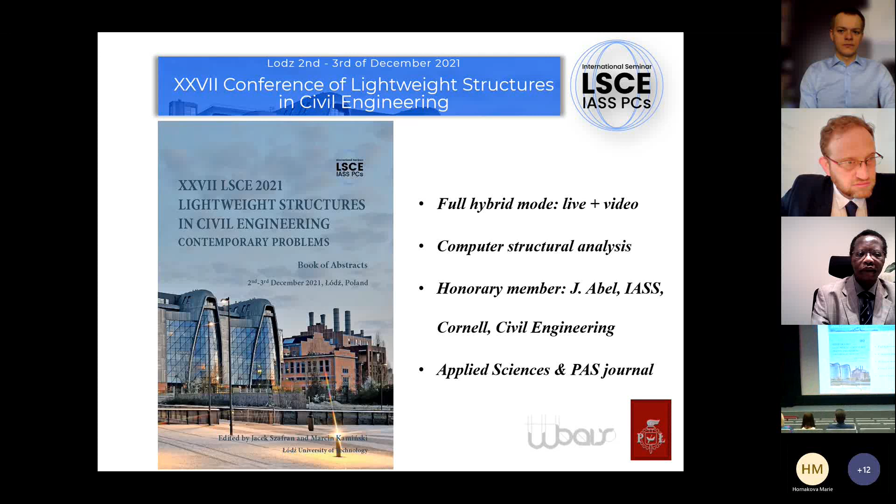Some basic facts about our conference are collected in this slide. We have 4 general lectures from Japan, Italy, South Africa, and the United States of America. We have 3 invited lectures, domestic lectures from Lublin University of Technology, Poznań University of Technology, and the Institute of Fundamental Technological Research, Polish Academy of Sciences, as well as 31 regular lectures and presentations delivered by participants of this conference.

This led to 2 days of our meeting, unusually, and you have some listing of how many presentations are from specific centers in Poland.

The scientific committee of this conference consisted of 43 members from Austria, Italy, France, England, Scotland, USA, Japan, so highly recognized scientific researchers all over the world.

We have no parallel sessions. That is very important. Each participant of this conference will see everything if it is necessary and interesting, of course. We would have some dinners, gala dinner and farewell dinner today and tomorrow, later on, 5 p.m. And you are, of course, invited to see our city, as our dean said before.

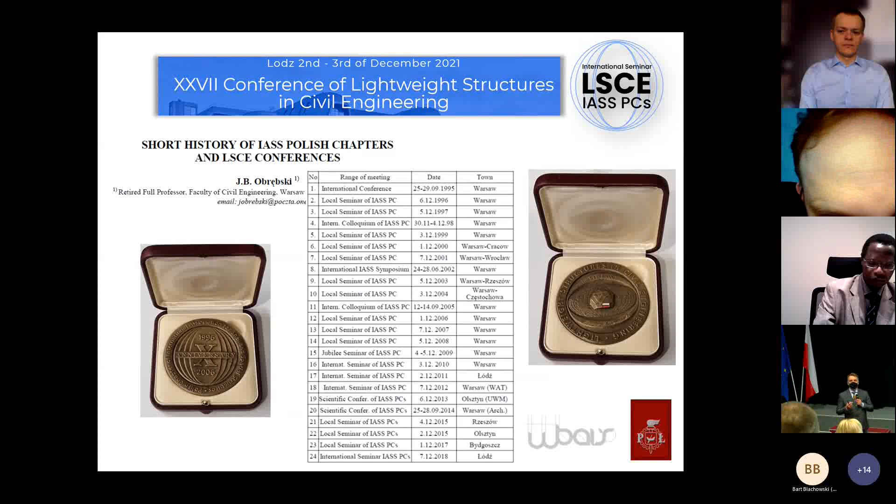It is not convenient maybe, but I would like to say that we have a relatively long history of our meetings. As you see, the first meeting was in Warsaw in 1995. After this conference, Professor Obrebski asked 3 persons to enter his room, and we established year-to-year meetings to present what we do.

So as you see, mainly in Warsaw, Warsaw University of Technology, but some other cities also: Kraków, Rzeszów, Bydgoszcz, Olsztyn, and also Łódź. In 2005, it was very nice for me to get the medal sponsored and designed by Professor Obrebski for the first 10 years of presence of IASS in Poland.

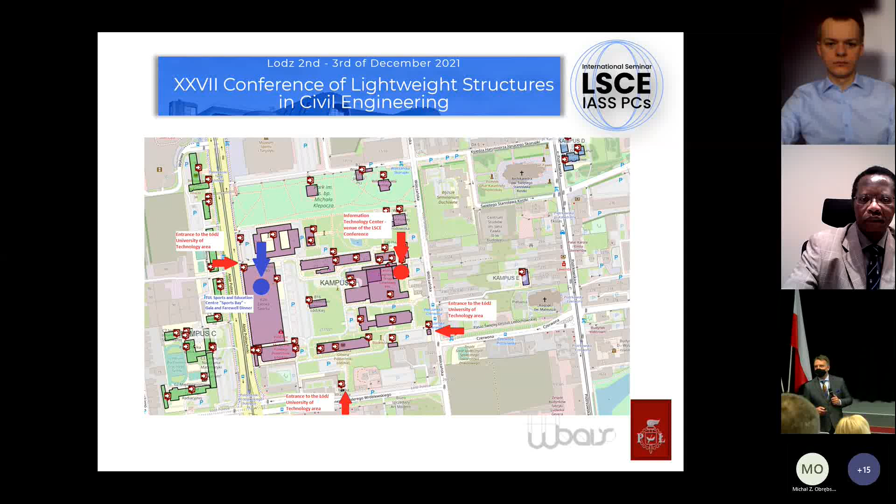Just a few places: we are located here at the Information Technology Center, that is our room, the entrance to the Łódź University of Technology on Aleja Politechniki, as well as our beautiful and enormously big sports bay, where we will have dinners, and maybe you'd like to visit for sport reasons. That is Piotrkowska Street. Everybody wants to see that. A lot of people, even from out of our country, ask what's going on at Piotrkowska Street. So that is our very famous Piotrkowska Street, and just a few important places for everyone.

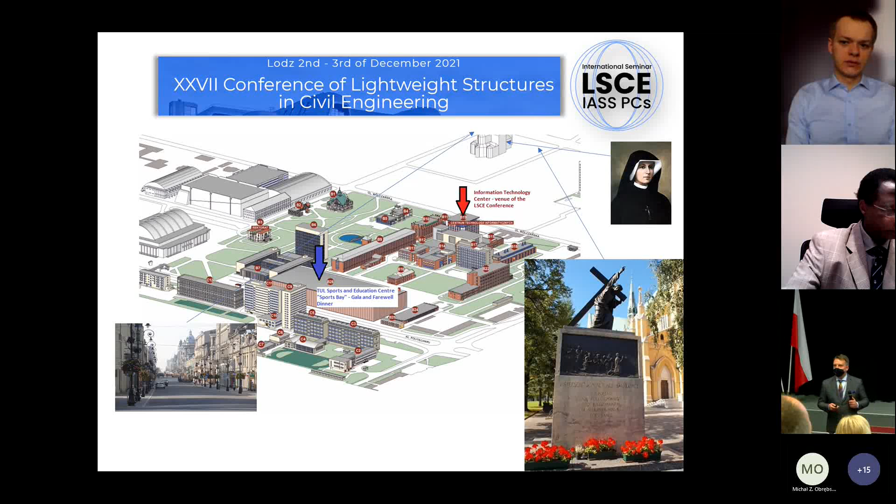Piotrkowska Street looks like that, and it's very close to our cathedral. We are located here, just a few blocks away, as people say in America. That is a memorial place of priest Ignacy Skorupka, who was very important for our history in 1920 - he led Polish troops against Russians during the Battle of Warsaw. Also very important for our city is St. Faustina, who has a specific path in Łódź, and our cathedral is one of them. So please enjoy our city and find everything interesting in it.

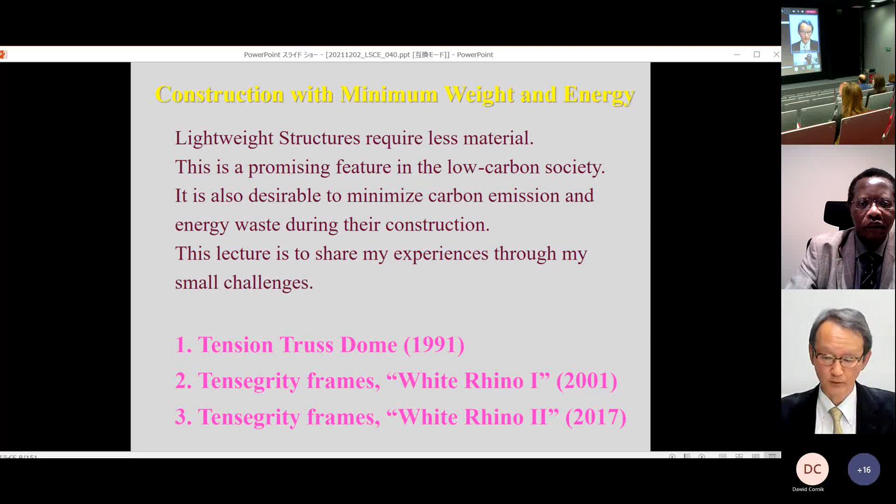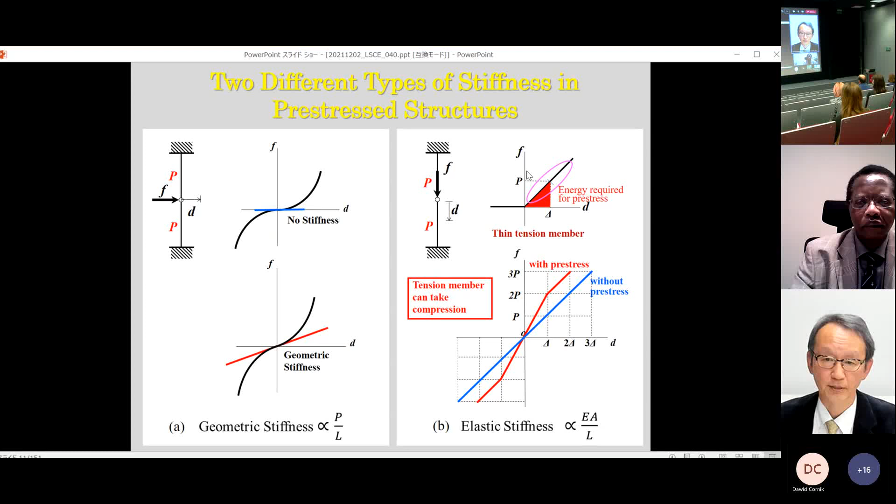If we prepare the prestress frame, we need to input some strain energy to the structure during construction. So one of the topics today is how we introduce the strain energy for the prestress during construction. The first challenge was for the construction of a tension truss dome.

When I was a PhD student, I was asked to propose an extremely lightweight structure for the construction of an annex space on an existing building. Because the existing building was old and not designed to have an extra building on top of it, we needed to design an extremely lightweight structure for the annex space of this roof space.

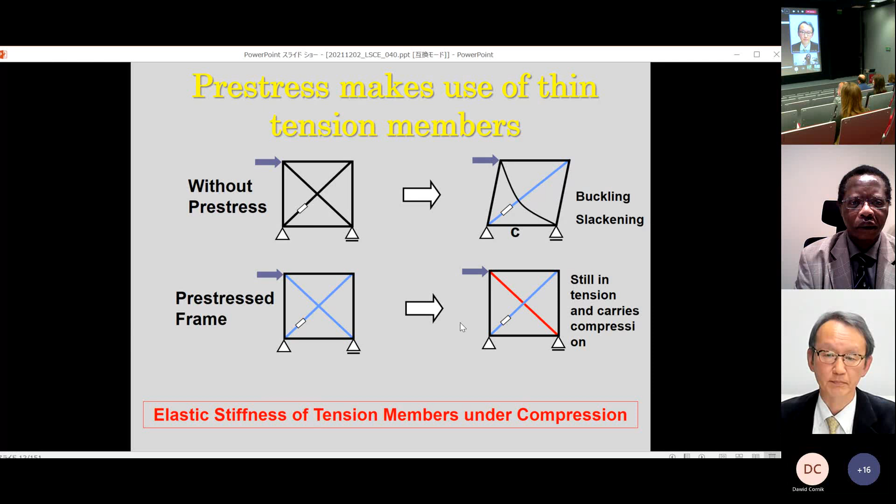During that consideration, I thought why not use this effective feature of lightweight structure. So I investigated and proposed some prestressed frame structure. Finally, what I proposed for this project was this type of unit structure, which I later named the tension truss. This is a unit structure which consists of 4 bar links, 1 isolated post, and 8 tension rods.

In this formation, this unit structure has one statical indeterminacy. That means the pre-stress mode has only one mode, so all the pre-stress in the members are proportional to this one mode.

I also plan to introduce how to introduce the pre-stress into the members, using a small turnbuckle. This is a specially designed turnbuckle, which will be rotated at a certain level of torsion to

shorten the length of the member to introduce pre-stress to the structure. That means we need to introduce some strain energy during construction. Before construction, we made a mock-up model with 4 units, and experimentally we evaluated that a torsion of 4 kilonewton centimeter can introduce 10 kilonewton

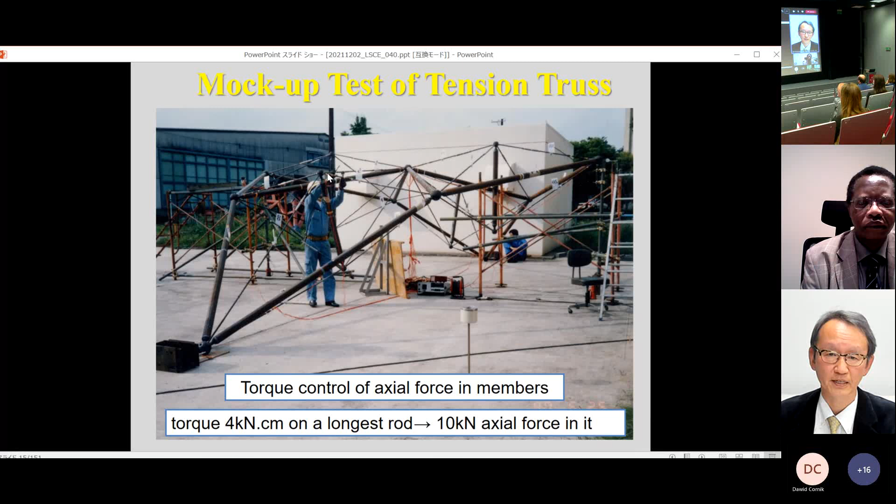axial force to the longest member of the unit. We used this result, and at the construction site we also used a special device called a torque wrench, which clicks at a certain fixed level of torque, and becomes flexible, relaxed, once it reaches that torsion. This device was very convenient for introducing the torsion, and the actual compression or tension, into the member.

This is some measured result at the site. The level of tension introduced was mostly okay for the design value, but at the same time we had several differences, so I thought we need to develop some theory later.

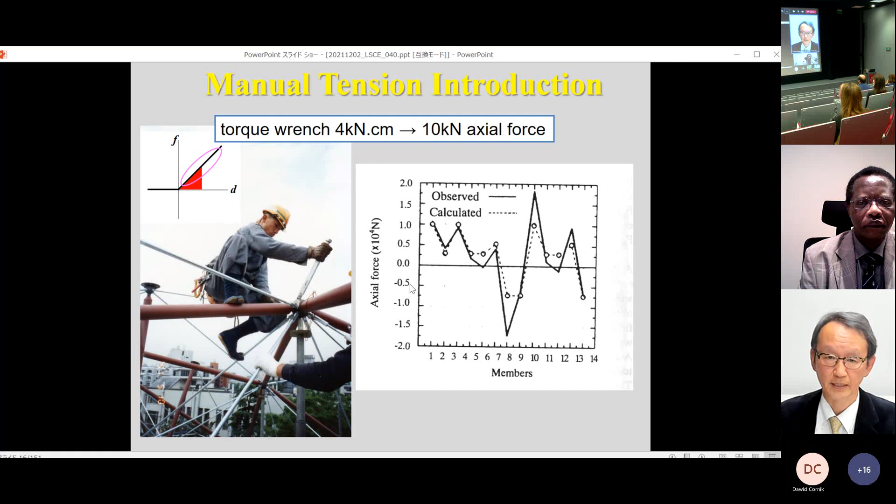This is a view after construction of this tension truss dome. The construction went very successfully, and I was very happy to realize such a lightweight structure for the annex of the building. This is an interior view of the completed structure, and this is the exterior view.

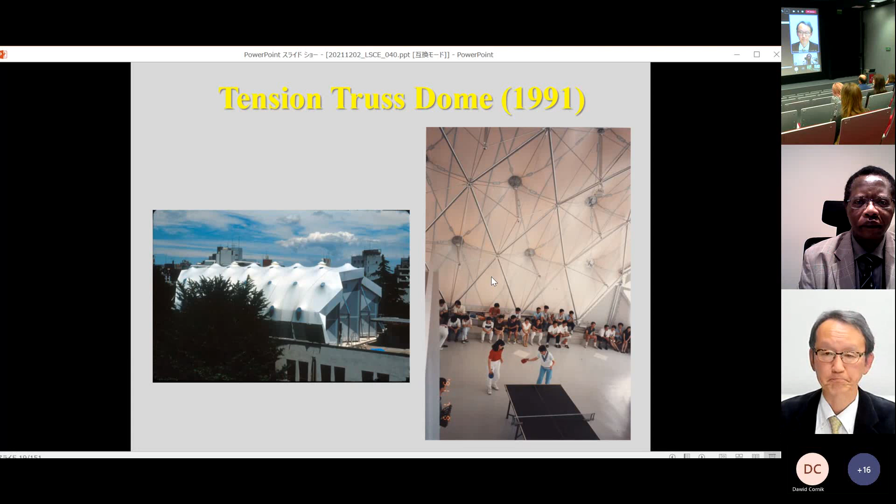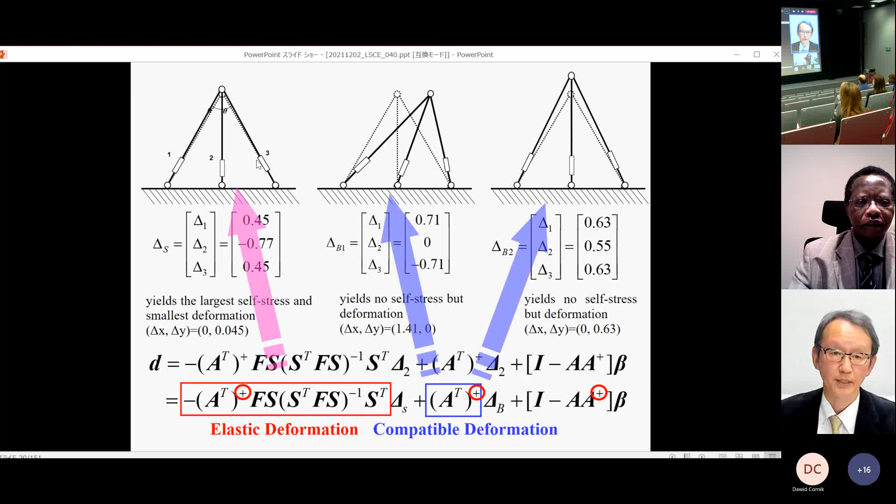During this construction and design, I felt that we need to develop some theory for the operation of a frame structure with many turnbuckles. We have already developed the theory for how to control the length of the members of the frame with many turnbuckles, but today I don't want to go into the detail.

At the same time, with this formulation, we could calculate the strain energy induced to the structure during the operation.

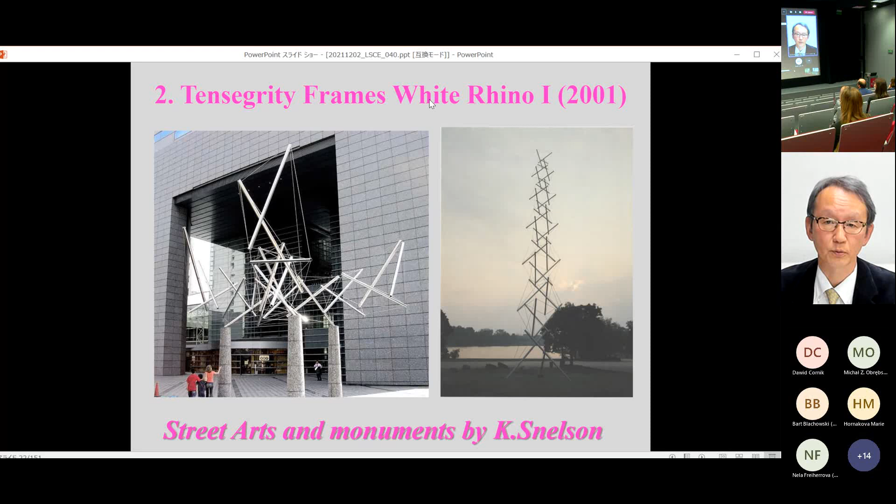The second example challenge I would like to share with you is about the design and construction of tensegrity frames, called White Rhino I, constructed in 2001. This is a typical tensegrity frame. This type of structure can stand for its own weight and it looks stable.

However, it is well known that the rigidity or stiffness of this frame comes from the geometric stiffness. That means the stiffness of this structure is very, very low, nonlinear, and low.

So I propose to add 3 more tendons to this structure. These 3 tendons very effectively act as a member to introduce more prestress to this structure, and can also take the compression after the prestressing.

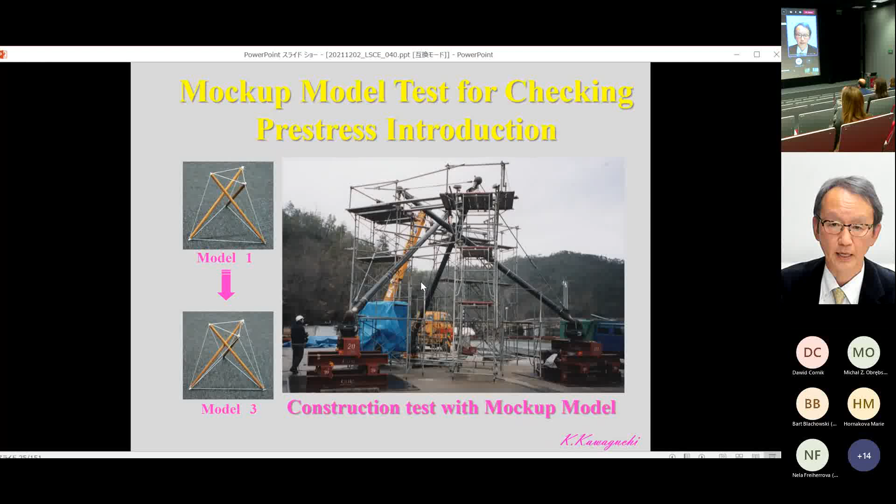We made a mock-up model and checked how we introduce the prestress into the structure. This is a view of this frame during the construction.

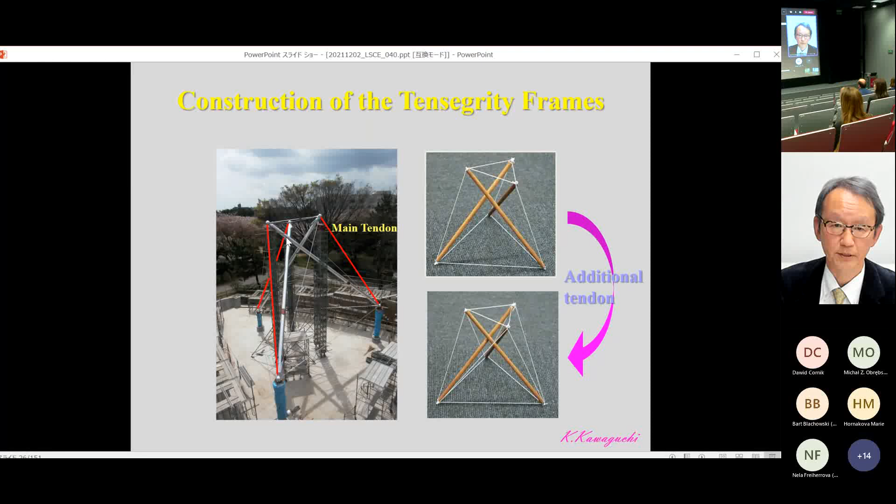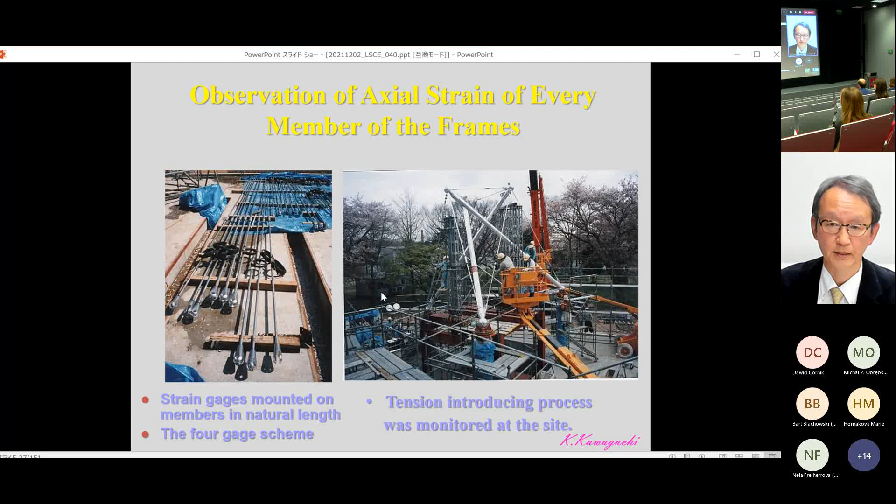As you can see here, first we put the main tendon for the original tensegrity, and we added 3 more tendons to take the compression load or stress under external loading. We mounted strain gauges on all the members and monitored all the tensions at the construction site. Again here, we also used human power to introduce the tension into the frame, prestressing the frame.

Actually, there is a limit to the amount of tension that manpower can introduce by turning the turnbuckle of the tension member. I will show you later, but that is normally about 40 kilonewton at the construction site. So in this case, we limit the maximum tension that one person can introduce to one tension member to 30 kilonewton.

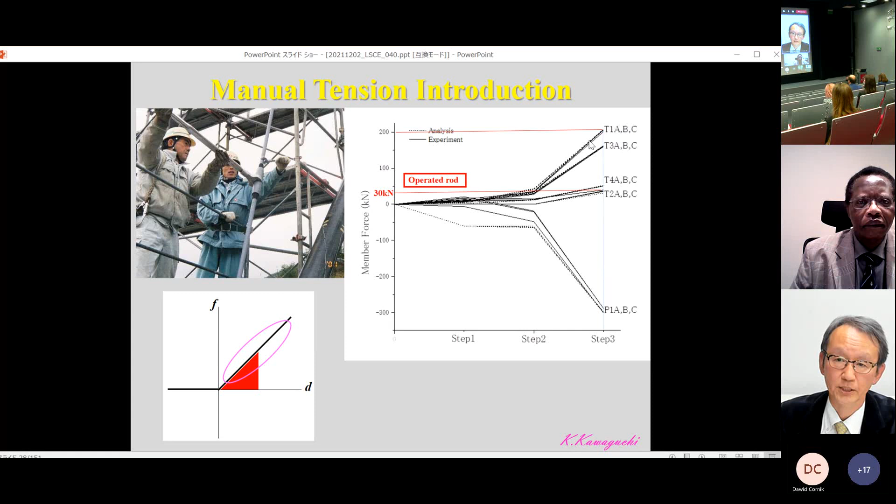Through this procedure, it is possible to realize a much higher prestress level of members in the structure.

This is a view of the skeleton prepared for the membrane roof, and this is an interior view of the structure when it was completed. As far as we understood, that was the world's first structure using a typical tensegrity skeleton as a structure member to support a membrane roof.

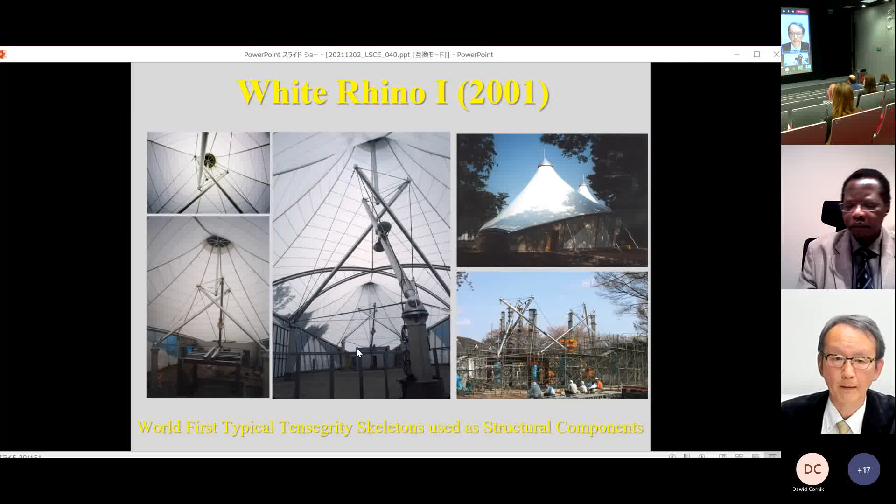For the introduction of prestress to this type of steel frame, the turnbuckle is very important. So we tested and checked the behavior of the turnbuckle. We measured the maximum tension that one man can introduce to one rod by turning the turnbuckle.

In the laboratory, the amount was something like 80 kilonewton. However, the condition of working is very different at the construction site. So we limit the maximum tension that one man can introduce to one tension rod to about 40 kilonewton.

For example, the man is standing on such unstable decks, so we need to expect a much lower level of tension that he can introduce to the tension members.

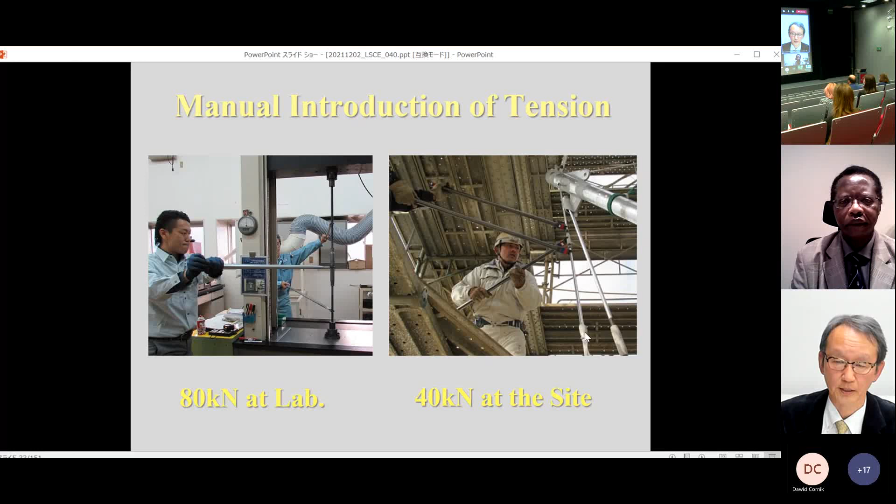The third example I would like to share is a tensegrity frame, White Rhino 2, which was completed in 2017. In this case, we designed two types of tensegrity frames to support the membrane roof.

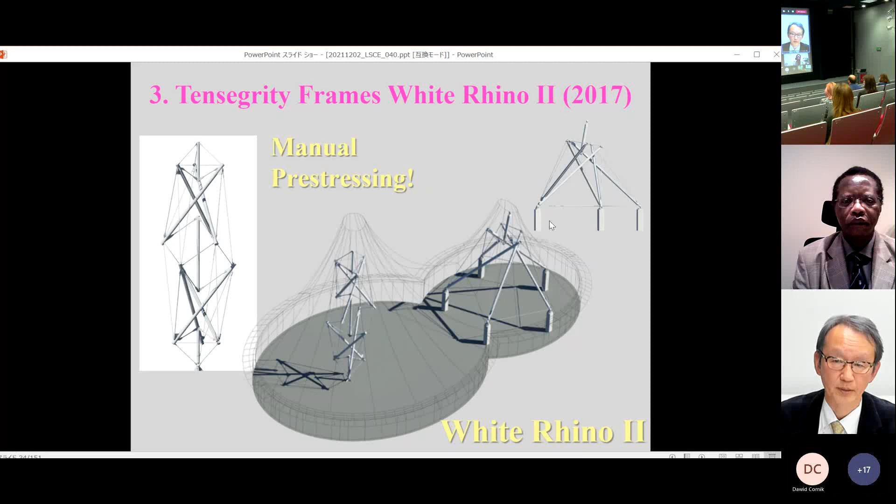Today I just explained about this tower type tensegrity. Actually, we designed this pentagonal type too, but today I don't speak about this because of the time.

This is an arrangement of the members of the tower type tensegrity. As you can see, this is more complicated than the former one, and we have many tension members and compression members, and also many turnbuckles installed on most of the tension rods.

This time, we didn't have enough time for making a full-scale mock-up, so instead we made a 1-to-10 scale model to check the prestress introducing scheme.

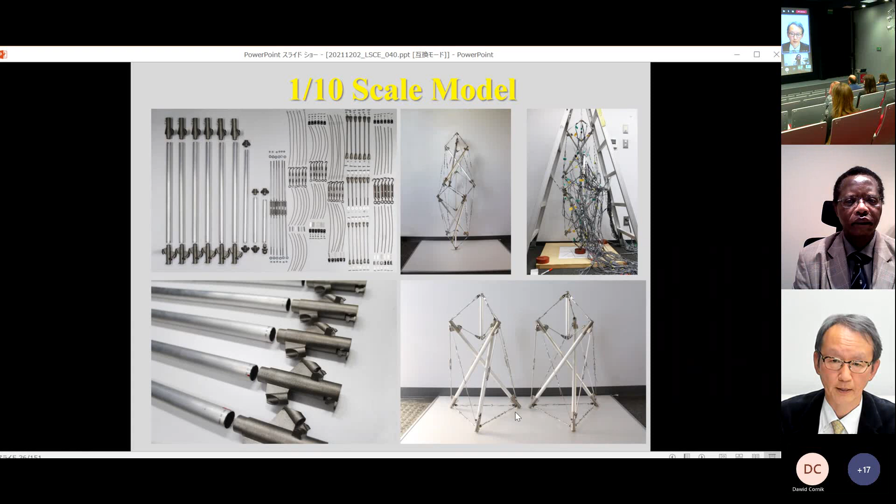First, we prepared these two tensegrity frames, and we attached these two models to each other to make a tower type structure. This is a connection area, and during the construction we see the frame deforms in a very large scale. So some of the details must be designed to accommodate such a large deformation.

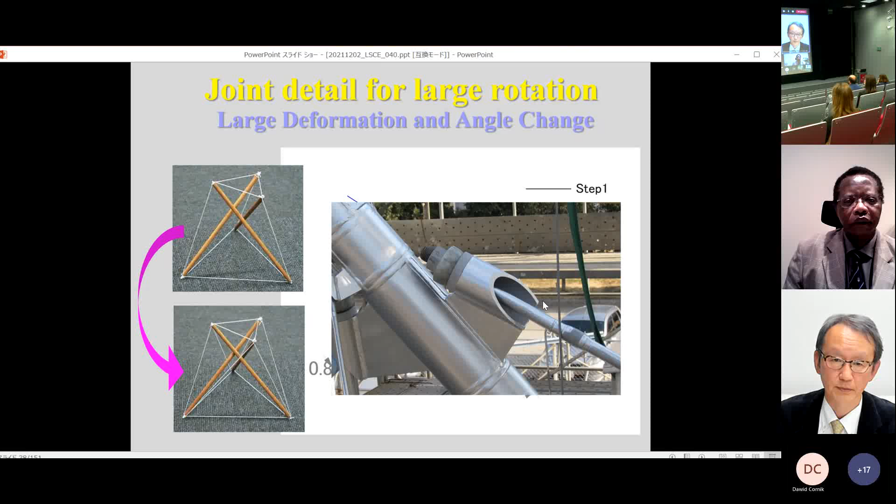For the construction of this type of tower skeleton, first we had triangular tension members at the bottom of these two units. After combining these two units, we added other tension rods, and then finally we removed these triangles so that we could have a more simple appearance of the tensegrity tower.

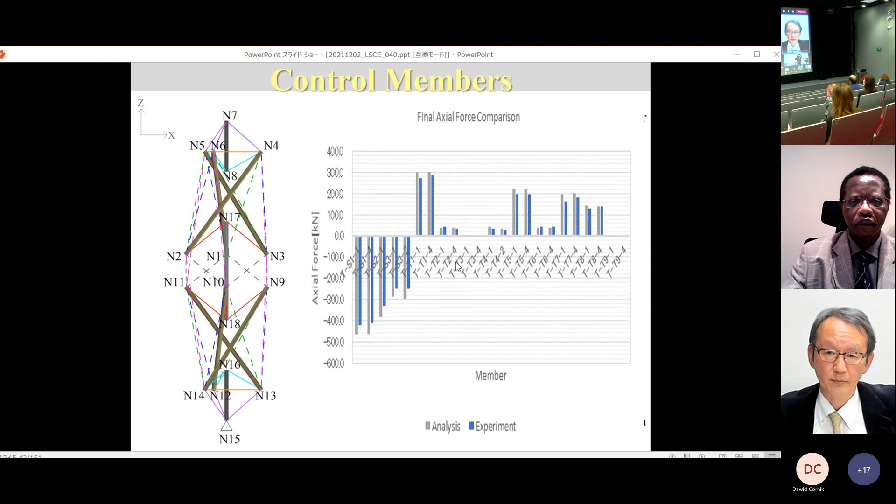As you can easily imagine, it was very complicated to establish or construct this type of tensegrity frame, especially balancing the tension in the frame. Again here we limited the level of tension of the controlling member to 40 kilonewton.

First, in this case, we operated three members until they became 30 kilonewton. Then we added another three members for controlling, and these were operated until they reached 35 kilonewton. During this operation, the former controlled member reached a higher tension. In such a way, we gradually changed the controlling members until we could introduce the necessary tension to all the members of the tensegrity tower.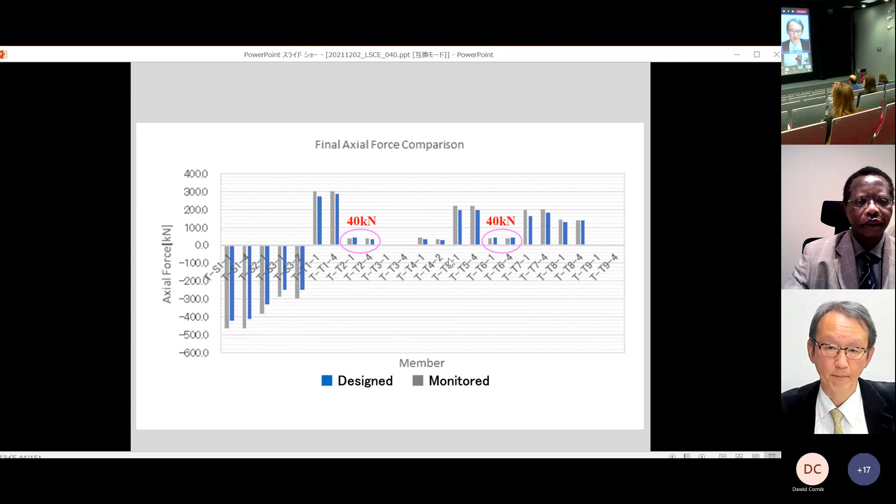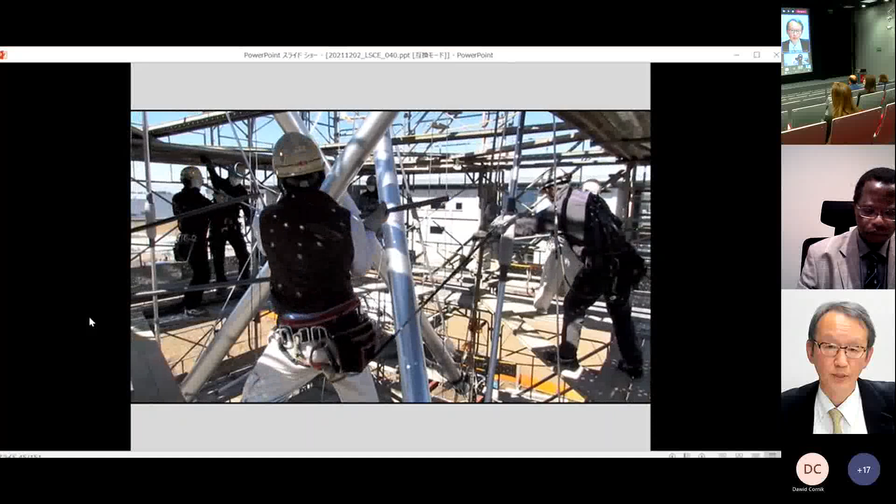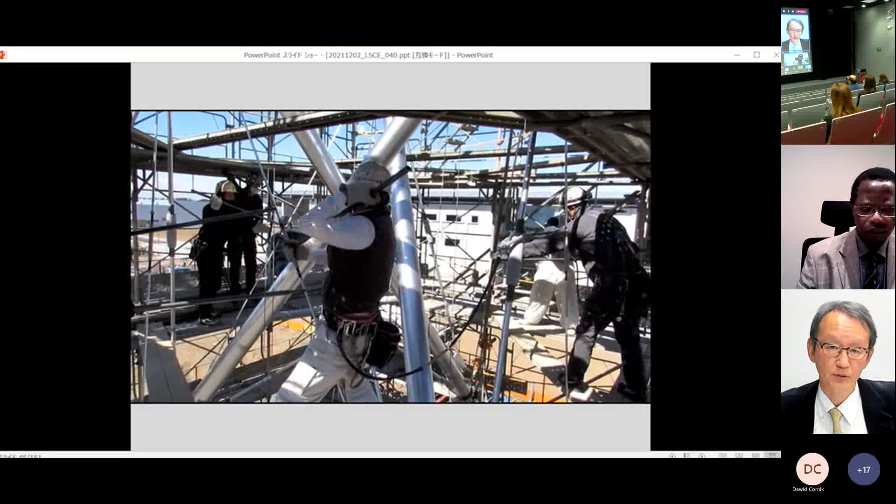This is another video from the construction site. First we assembled the unit of tensegrity, and then we put this tensegrity to another tensegrity that was waiting here. This is how we constructed the tensegrity skeleton.

These are some photos of details of the structure, and this is the interior view when it was completed.

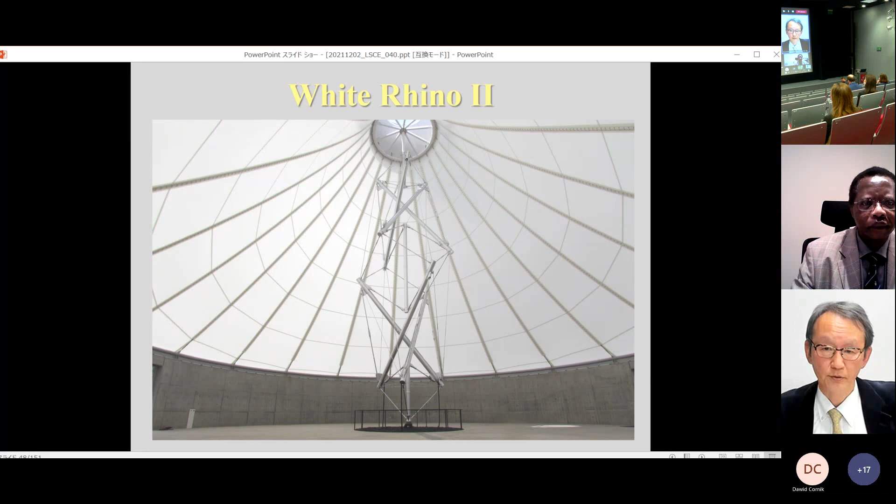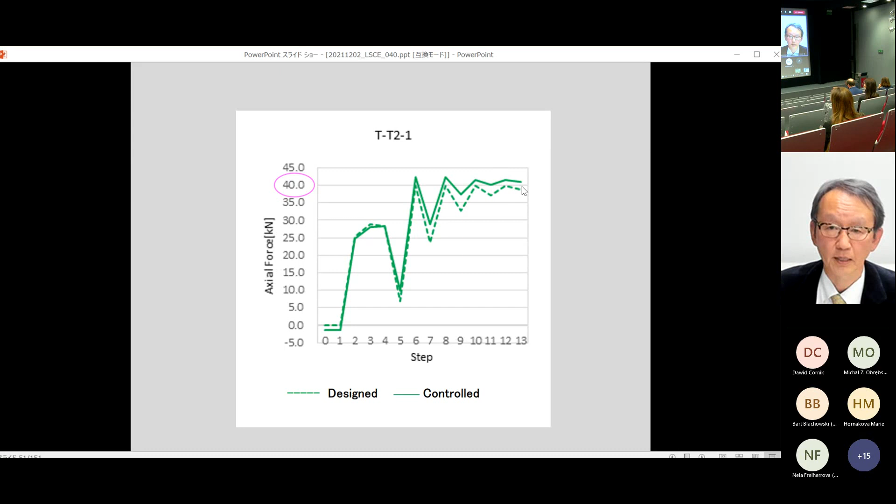Okay, so this is another result of the measurement during the construction. So the final controlled member, tension member, this is a step versus the level of axial force. You can see that the level of the tension member gradually converged to 40 kilonewtons, because this member was used as the final controlling member to introduce prestress to the tensegrity tower.

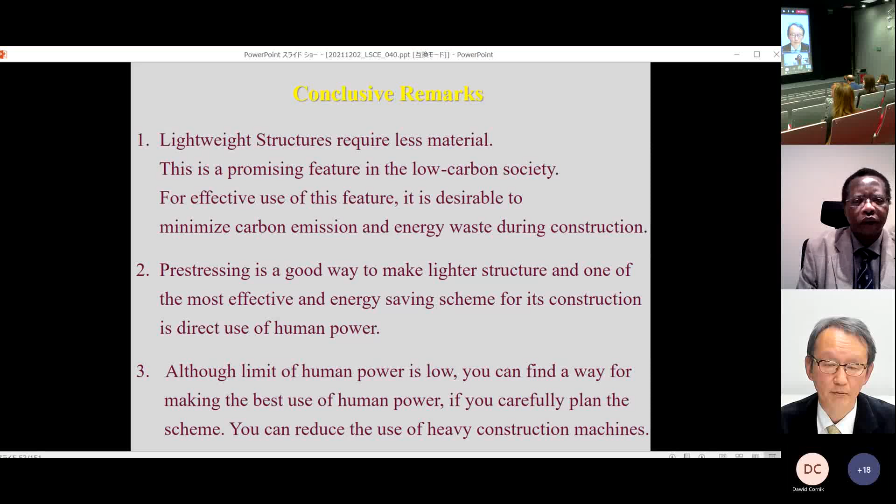The first, lightweight structures require less material. This is a promising feature in the low carbon society. For effective use of this feature, it is desirable to minimize carbon emission and energy waste during construction. Prestressing is a good way to make a lighter structure, and one of the most effective and energy-saving schemes for its construction is direct use of human power. So that I wanted to show through my challenge.

Although the limit of human power is low, you can find a way to make the best use of human power. For example, in my case, the level of tension was limited, but we try to make the best use of this power in making such tensegrity towers. If you carefully plan the scheme, you can do that, reducing the use of heavy construction machines by replacing the effort with human or labor power at a construction site.

Okay, thank you for your kind attention.

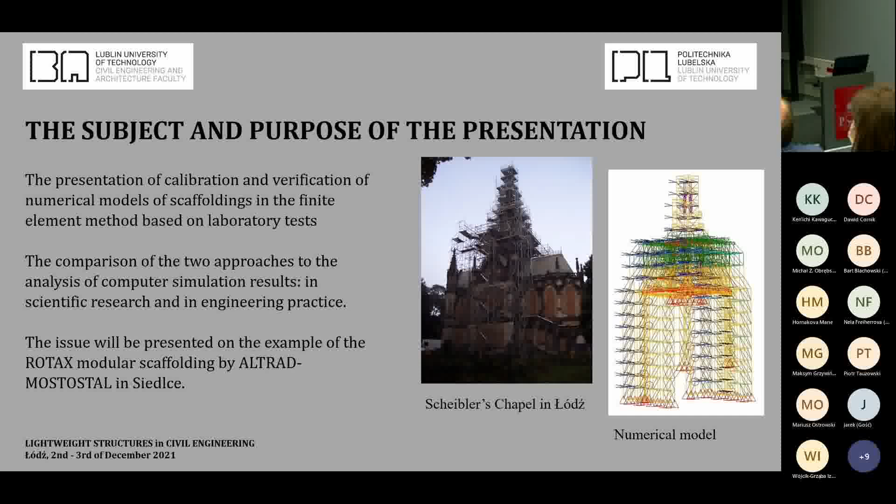This figure shows the scaffolding around Scheibler's chapel in Łódź. Scaffoldings are assembled from components with different levels of geometric complexity: stand, ledger, brace, which are slender and can be modeled with frame elements, but platforms which include a few decks and joints have complex geometries, and I will pay the most attention to this object.

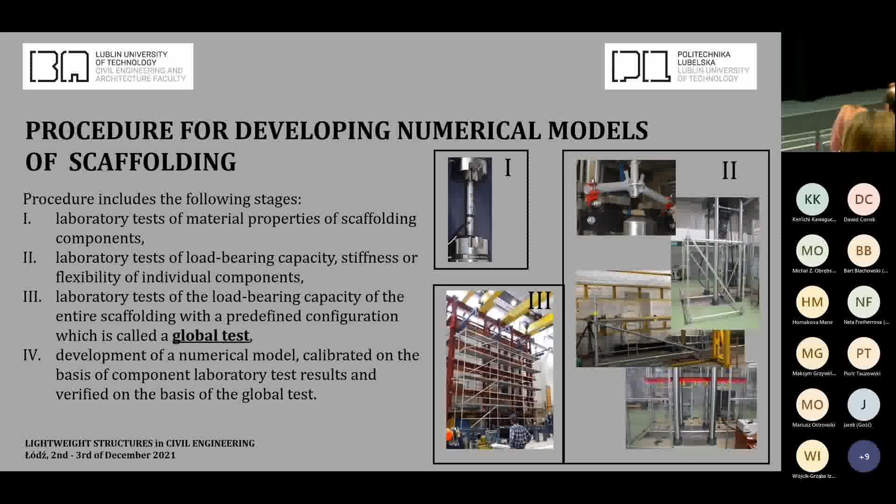Because the introduction of a scaffolding system to market has to proceed through many laboratory tests. The procedure of these laboratory tests includes the following stages: laboratory test of material properties, laboratory test of individual components, laboratory test of the scaffolding - but it is a special configuration scaffolding, and this test is called a global test. On the basis of these laboratory tests, we prepare a numerical model of the scaffolding.

The stand-ledger connection is subjected to internal forces, and the most important for a numerical model are bending moments which act in two planes, vertical and horizontal. These figures show the laboratory test for these internal forces. The results of this test are stiffness as a function - the relationship between moments and angles - and load bearing capacity at bending for moment along a vertical and horizontal axis.

The stiffness of stand-ledger joints is taken into account by introducing a transition element. It is an element with constant length - I assumed 5 centimeters - and with a rectangular cross section. In order to calculate the properties of this element, we use results from the test. These results from the test are shown here.

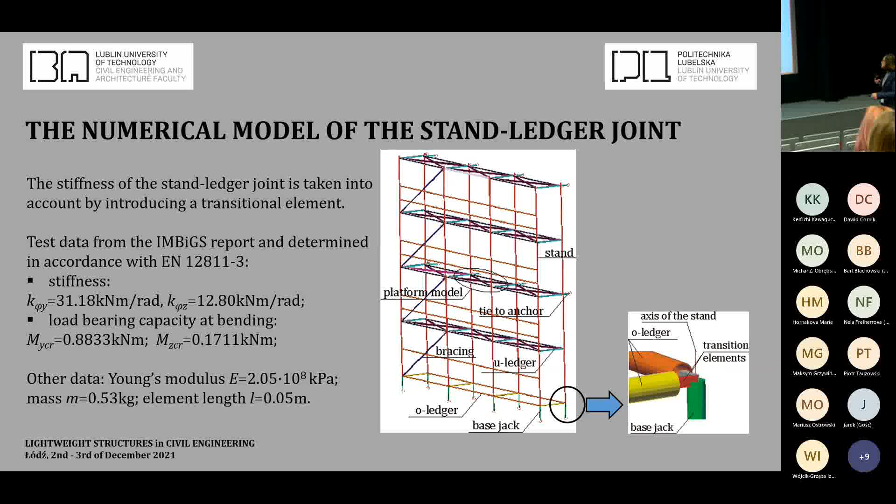First, we calculate moments of inertia. Next, from these formulas, we calculate the dimension of rectangular cross section. And next, we calculate yield strength. The final results are shown here.

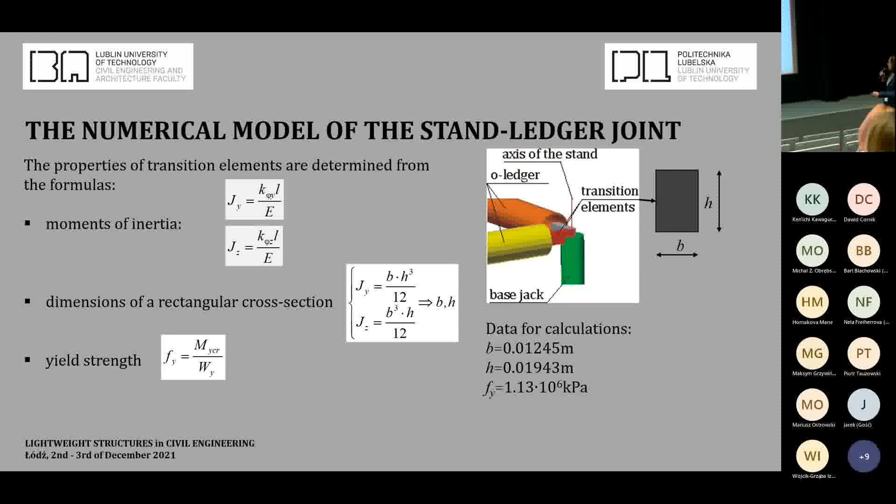The model of joints is simpler than the model of scaffolding platform. And the geometry of scaffolding platforms is very complex. It is one deck.

The scaffolding platforms play a double role. They serve as working platform, and they ensure the horizontal stiffness of a scaffolding. And if I say the model of platform, I mean the model of horizontal stiffness of the scaffolding, which is created by the platform.

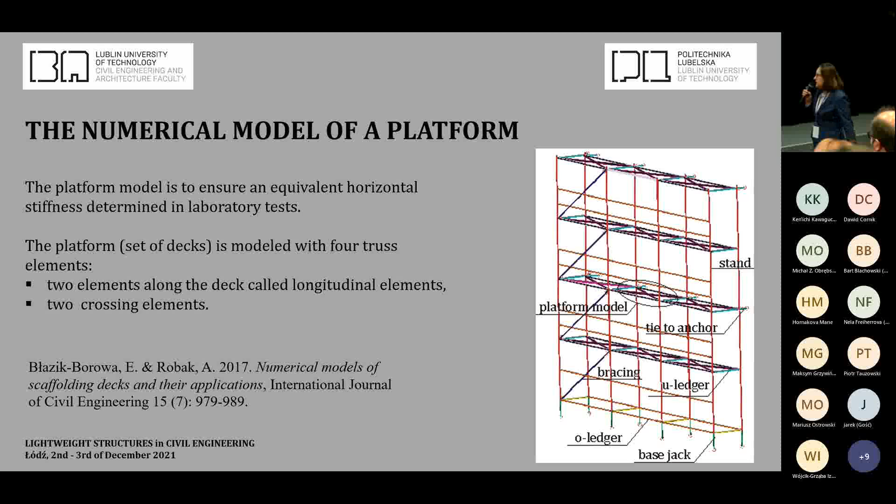The platform model is to ensure an equivalent horizontal stiffness determined in laboratory test, and the platform is modeled by 4 truss elements: 2 elements along decks, called longitudinal elements, and 2 elements which are crossed, called crossing elements.

In order to calculate or evaluate the properties of these elements, you have to use the results from measurements, and we have 2 types of laboratory tests.

The small configuration of scaffolding with platform is loaded with a force perpendicular to the platform, and in a parallel direction to the platform. I show the static scheme, because I think this photo is not clear.

The results of both measurements are the force-displacement relationships, which are shown here.

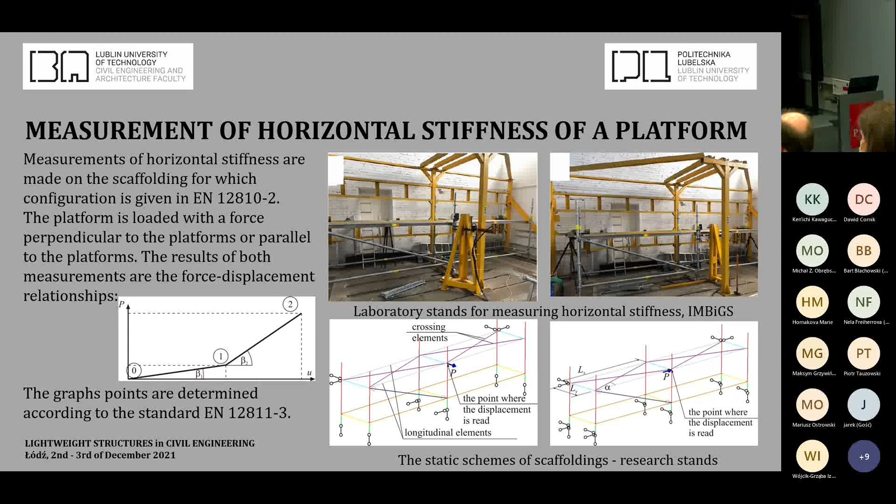We assumed that the cross-section area of these truss elements are constant, and we assumed this value. Elements have the same material properties in compression and tension.

The influence of longitudinal elements on the stiffness at perpendicular loading is negligibly small, and each fragment of the sigma-epsilon graph, which will present the properties of our elements, is determined on the basis of the suitable part of the force-displacement curve. Because time is short, I show only one example, one small part of this derivation of the formula.

This part of the sigma-epsilon curve for crossing elements is evaluated on the basis of this part of the force-displacement graph.

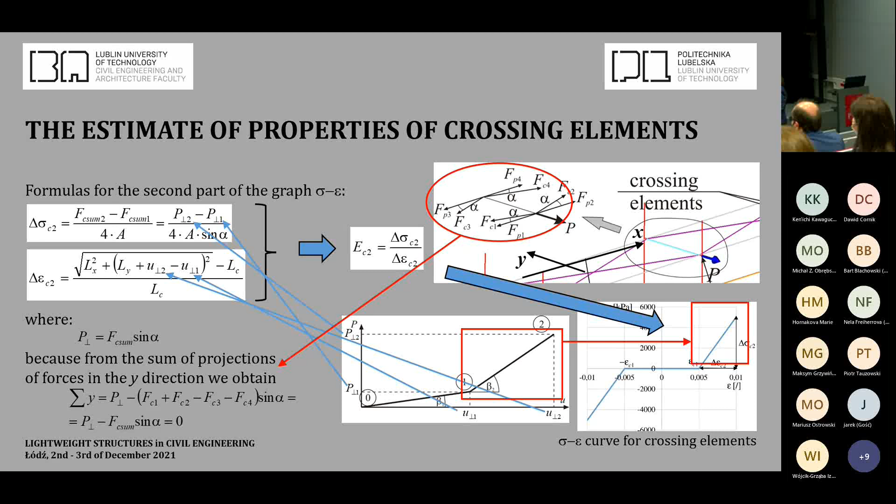This formula is inserted here, and we obtain the increment of the stress. Of course, the quotient of stress and strain allows us to calculate the stiffness modulus, the elastic modulus.

The numerical model of platform must be corrected due to features of the laboratory test. For example, we have clearance in wheel guides.

After this correction, after a few iterations, we obtained the final sigma-epsilon curve for crossing elements and for longitudinal elements.

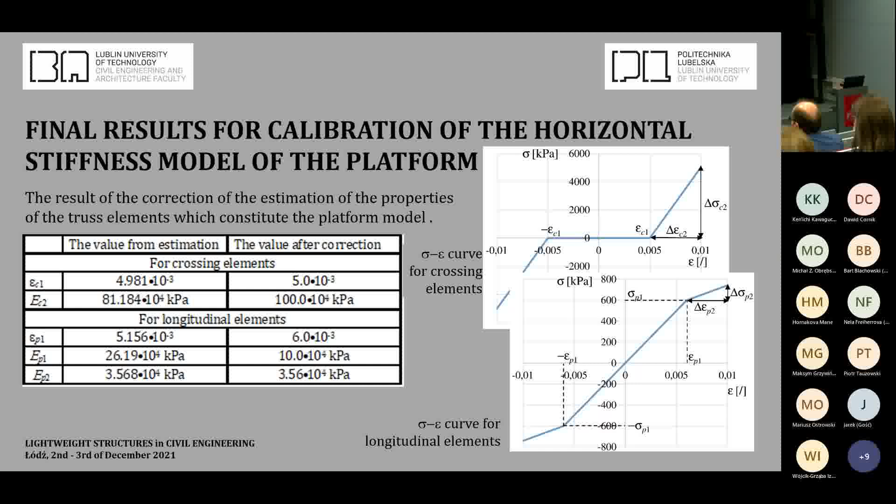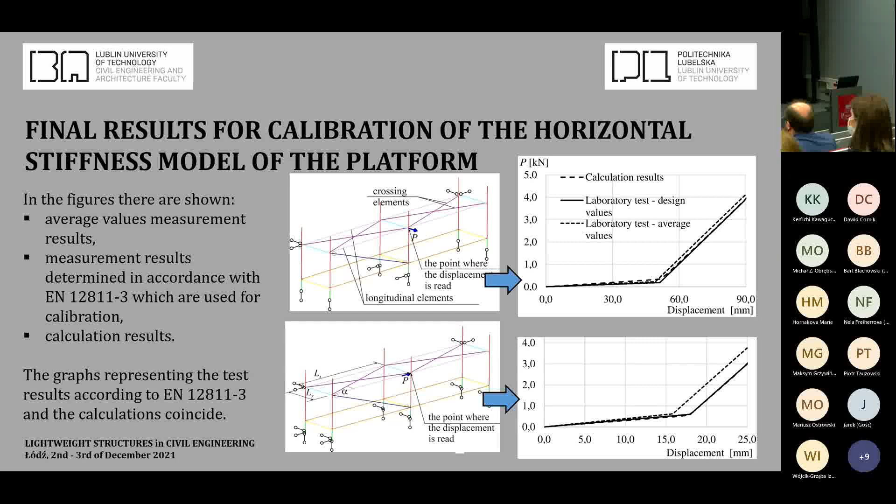These 2 lines, which coincide, represent measurement results determined in accordance with the standard. It means that our values, results of measurements, are defined as 5% quantile, and calculation results.

During this test, the scaffolding is subjected to a horizontal force and by vertical forces, and the vertical forces increase until the scaffolding loses its load bearing capacity.

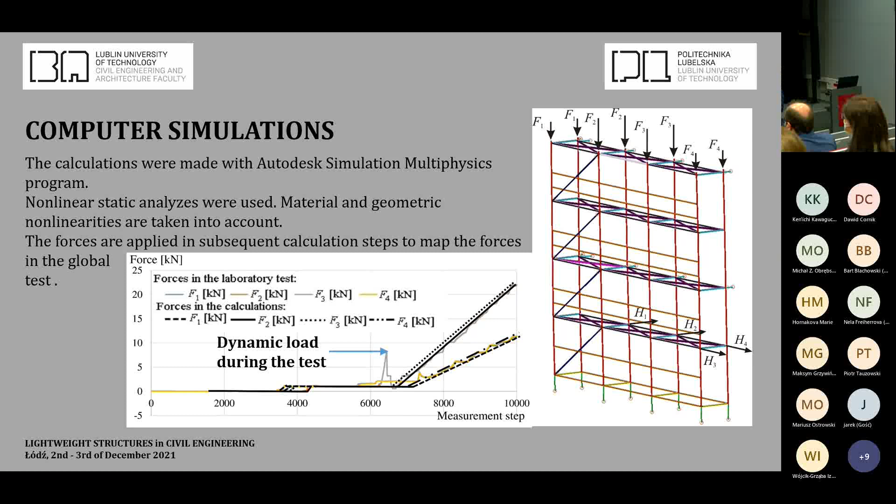And the results, the laboratory global test and calculation results. The main results are displacement in 12 points as a function of the forces, or force, because we have the same vertical force which is applied here.

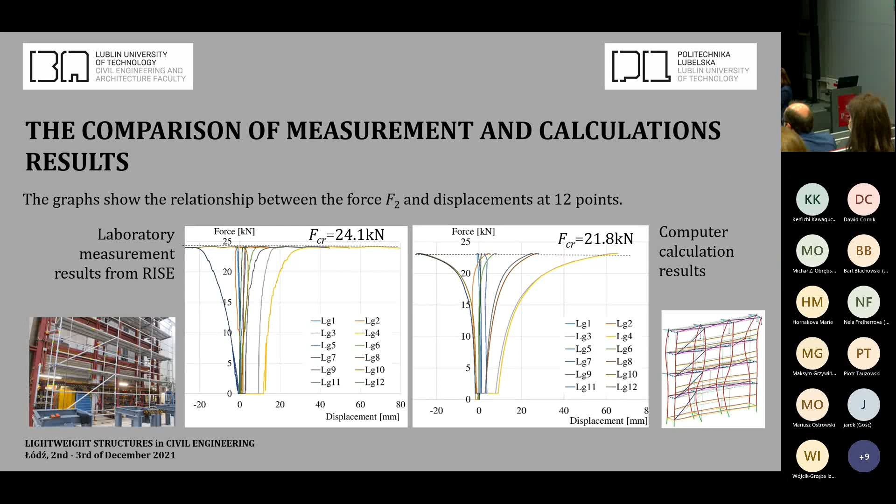Scaffoldings achieved the following shapes. It lost bearing capacity. Both figures show a similar bend of the stand in the middle vertical. And the load bearing capacity from calculation is 10% smaller than the critical value from the laboratory test.

And the final comparison of results of calculation and measurements. We have one type of measurements and two types of calculation. The first variant is obtained for the value defined as the 5% quantile for a confidence level of 75%, and the second variant of calculation is obtained for properties which were calculated on the basis of average values from measurements.

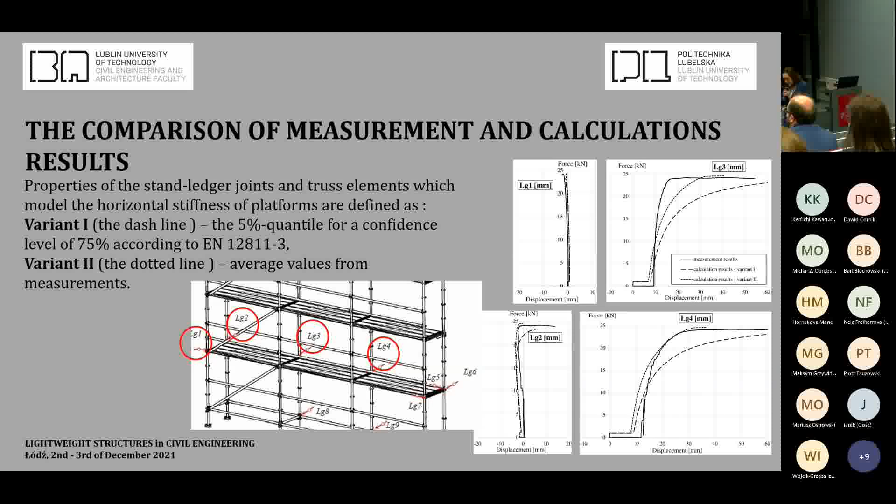The first variant is used in engineering practice, and results of calculation have to guarantee the safety of the structure. Therefore, the model verification criteria is to obtain a larger displacement at the same loads. The graph from calculation have to be below the results from measurements, and critical force should be smaller in calculation than measurement.

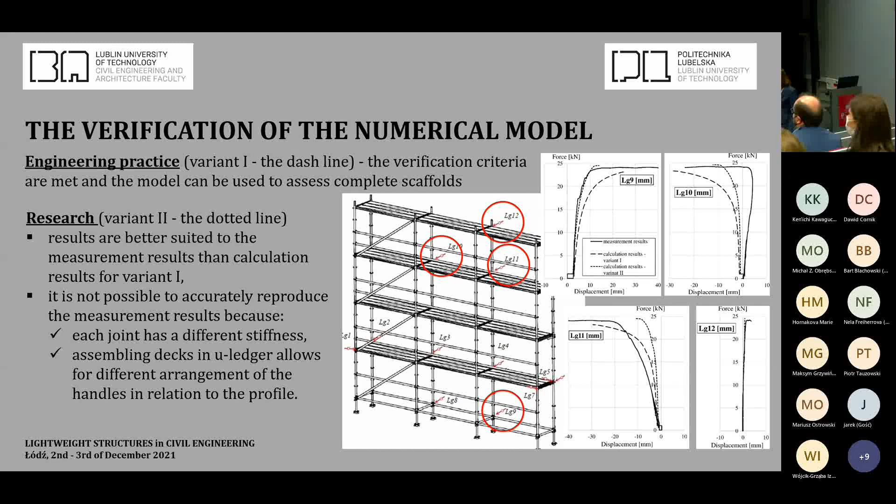In scientific research, the model verification criteria means the most faithful and accurate description of the behavior of the tested object. For engineering practice, the verification criteria are met and the model can be used to assess a complete scaffold. For scientific research, results obtained for average value from measurement are better, but it is not possible to accurately reproduce the measurement results because each joint has a different stiffness. Assembling decks in u-ledger allows for different arrangement of the handles in relation to the profile.

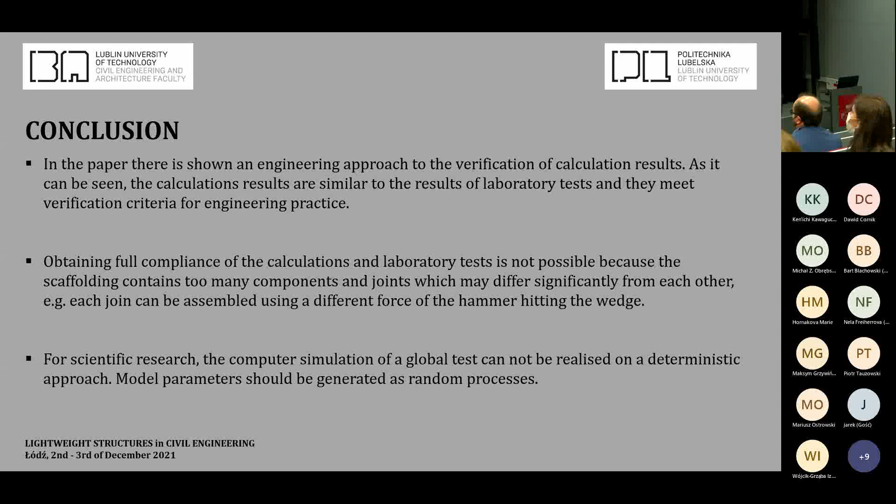So, in conclusion, the paper shows an engineering approach to the verification of calculation results. As can be seen, the calculation results are similar to the results of laboratory tests and they meet verification criteria for engineering practice. Obtaining full compliance of calculation and laboratory tests is not possible because the scaffolding contains too many components and joints which may differ significantly from each other.

For scientific research, the computer simulation of a global test cannot be realised on a deterministic approach. Model parameters should be generated as a random process, and this is the task for us in future. Thank you for your attention, and I'm sorry for my pronunciation.

Thank you very much for the very interesting lecture. It was very nice to see the third conclusion. We are interested a lot in random processes and stochastic analysis here at Łódź University of Technology, so we can cooperate in some way.

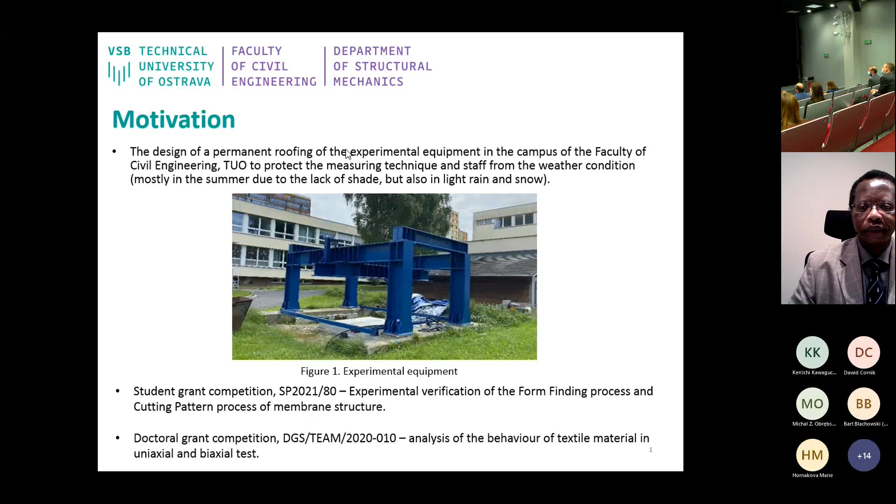It's located in the campus of our department, and it has been designed for static load tests and other experiments for the investigation of stress and strain relations for soil structure interaction. Currently, it's not protected against unwanted weather conditions, so together with the dean of our faculty, we agreed to try to design and roof it with a small membrane structure.

This project is solved in a student grant competition called Experimental Verification of Form Finding Process and Cutting Pattern Process of Membrane Structure. Another area in the field of membrane structure is our team project, the doctoral grant competition, which is interested in analysis of behavior of membrane textile materials.

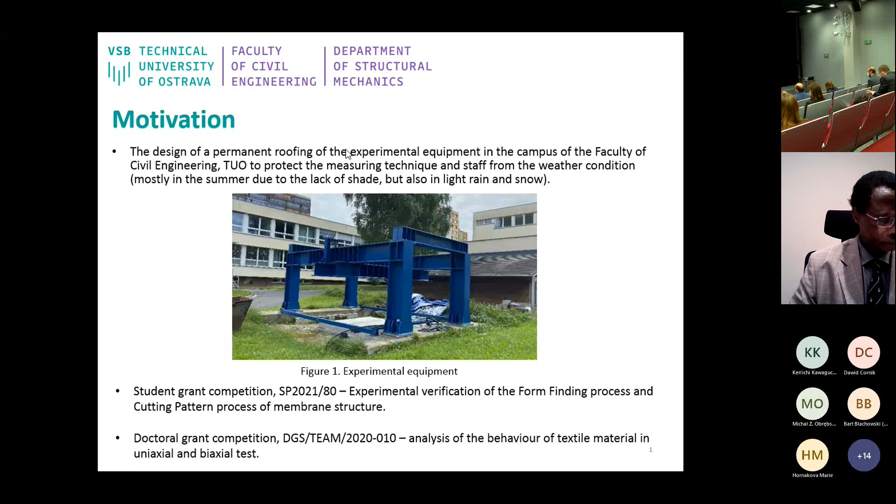For numerical analysis, the software RFEM was chosen. The RFEM software has a special add-on module, RF form finding, which is very useful for design and optimizing analysis of membrane structures. We can see here the use of the existing foundation for pin-supported columns, with 2 rods for every column and inserted cables along the entire fabric for pre-stressing the textile material. The initial pre-stress was set as 1 kilonewton per square meter in both directions. On the right picture, we can see the final model after the form finding calculation, which is then used for loading the whole structure.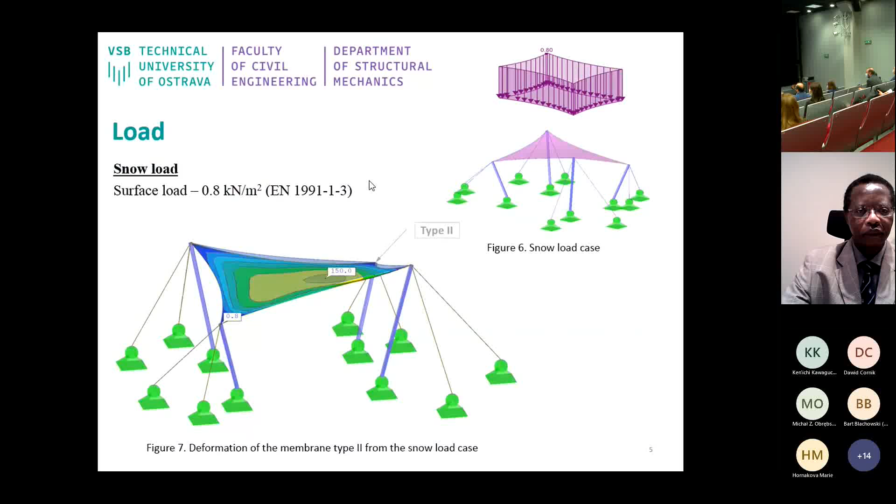Here we can see the load by snow. We chose this load case for analysis because it is quite simple to implement and apply in numerical models, and also because in winter time it can be critical and long lasting. The value of the snow load was determined according to Eurocode for the current location, Ostrava, and was set as 0.8 kilonewton per square meter.

On figure 7, we can see the final global deformation for one of the analyzed material types after loading the structure.

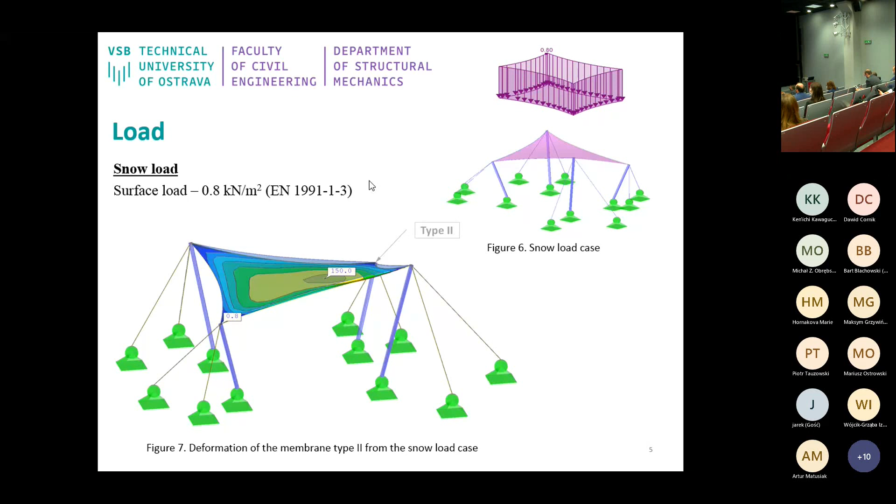For membrane structures, we know that large deformations are nothing bad. However, in this design, we were limited in terms of deformation because experimental equipment is located under the designed structure. So for evaluating the results, we set a limit of maximal deformation, determined as 200 millimeters. This limit should ensure that the membrane structure and the experimental equipment will not collide.

As can be seen, the type 2 polyester-based material is most suitable for this criterion, which was then chosen for the structure and for continuing our work.

Let me tell you about the current state of our project. Now we are trying to solve the wind load case. This is the field of interest of my colleague, PhD student Mr. Kawulok. For the wind load cases, the CFD simulation software RWIND was chosen. It's a steady state solver for incompressible turbulent flow, and the results are a pressure field on the building envelope and the three-dimensional wind speed field.

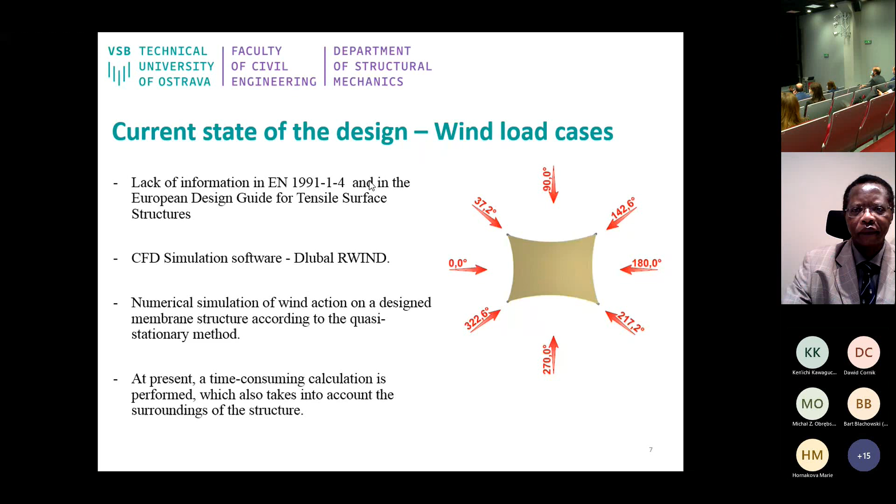A total of 8 flow directions, as seen in the picture, are considered for analysis. This is because the number of directions is given mainly by the asymmetry of the structure, so it's necessary to consider all possibilities. At present, a time-consuming calculation is being performed, which also takes into account the surrounding structures. After the calculation is finished, a study of the turbulence model with different turbulence intensity settings for all 8 directions will also be performed.

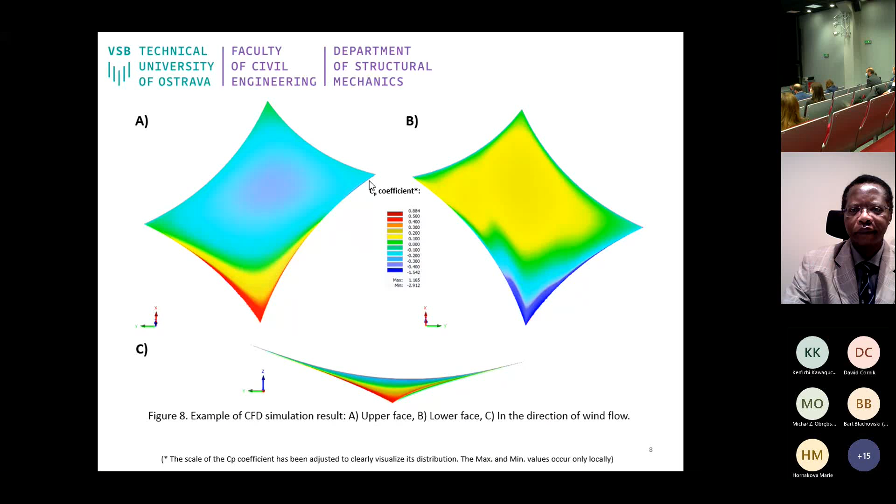Let me give you some conclusions. The numerical analysis was performed to determine what type of material should be chosen in terms of deformation for our membrane structure design, and the analysis was done for the snow loading case. Our evaluation criterion was given by the handling space between the structure and the experimental equipment, set as 200 millimeters. For this criterion, the type 2 polyester-based material was chosen as the best option.

For our continuing research in modeling with RFEM, as I mentioned before, elastic moduli and Poisson's ratio obtained from biaxial tests are needed. However, it's not easy to get closer to these characteristics, and that's why we are addressing it in another project focused on evaluating these methods. So maybe next year at this conference, we can tell you more about this topic.

This is all from me. Thank you for your attention and for the opportunity to tell you about our research.

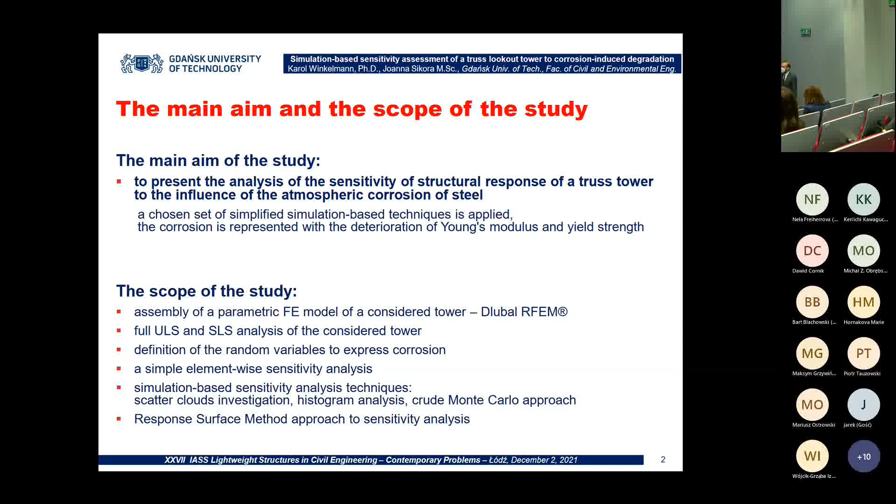The main aim of the study stands for itself. We are aiming to present the sensitivity analysis, but with the most simple methods that can be applied so that the approach can be useful to engineers in design offices.

And also, we expect that the corrosion can be represented by deteriorating, diminishing the Young's modulus and the yield strength of the material that the tower is made from.

The scope of the study, you can see below. We assemble a model, we take a full ULS and SLS analysis of the model, then we determine and define the random variables of the problem to express the corrosion processes. Then we make simple element-wise sensitivity analysis. Further, we take more advanced steps, but relatively simple techniques. And at last, we use the response surface method.

The tower is a real-life object. It's located in Kozacza Góra in Gdańsk, Poland. What is interesting, the tower is located in a dense mixed forest, and that's good for the tower because the tower tends to vibrate, and the vibrations are reduced by the presence of the trees around, so the wind doesn't take such harsh actions against the tower as it could be if the tower was in open air, for example.

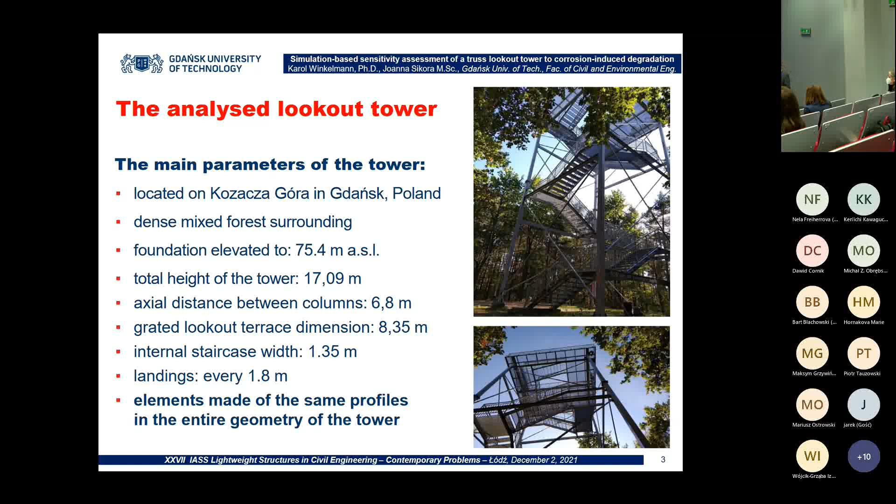You can see the parameters of the tower. I won't be reading them all, but what is interesting is that the elements of the tower are generally made from the same profiles in the entire geometry of the tower, because there are some towers where the geometry of the column profile changes upon the height of the column. This is not the case here. All used profiles are the same throughout the tower, so it's easy to group them and to transfer them into parameters that we investigate.

The FE model, finite element model, was assembled in RFEM by Dlubal. As you can see in the picture, really everything can be divided into simple groups where the crossbar, the columns, the transoms all have the same cross sections and can be easily grouped and easily defined as one simple object that is hit by corrosion.

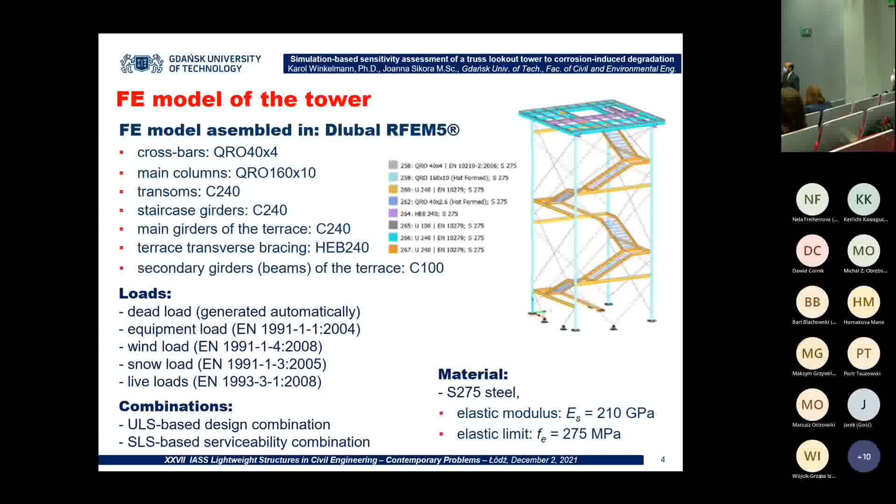As for the loads, standard loads were taken. For the live load, also a simple dynamic load was introduced, and the combinations ULS and SLS based combination standard for the design offices. The tower is made of S275 steel, so it's a standard steel for constructing such objects.

But what should be said here, the tower is endangered by the accelerations of the deck. But this is not the case of the study. Indeed, if you go to the top of the tower and you take one step, you can feel the vibration, the acceleration that is induced into the deck. So we don't believe that this was analyzed in the original problem, original design of the tower.

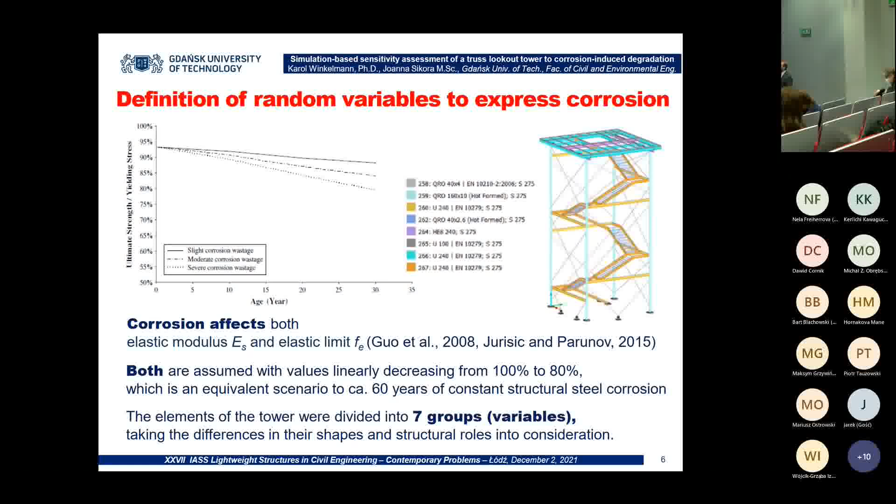The elements of the tower, as you can see, there are 7 different types, 7 different groups of elements, and they were considered as parameters investigated.

In the beginning, we have done a simple simulation analysis where we took only some standard points, standard models. We have created 35 models, 5 for each parameter, 5 for each type of cross-section, when we consider 100% the initial state, and then the corrosion that reduced those parameters, yield stress and Young's modulus, to 95, 90, 85, and 80%.

Thus, we can see a simple sensitivity assessment where you can find that the groups, the staircase, the main elements of the staircase, and the main transverse bracings are the most sensitive, that corroding them is the most dangerous action that can be done to the structure over time.

Now we have turned to more sophisticated techniques, if I can say that, because we are still based on simulation, the recalculation of FE models of the tower. First, we have applied the one-at-a-time technique that defines the sensitivity as the quantification, the description of a

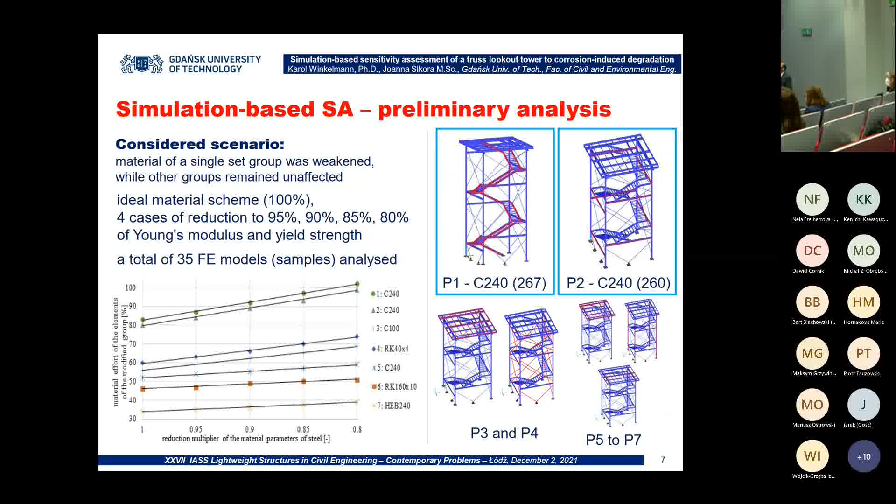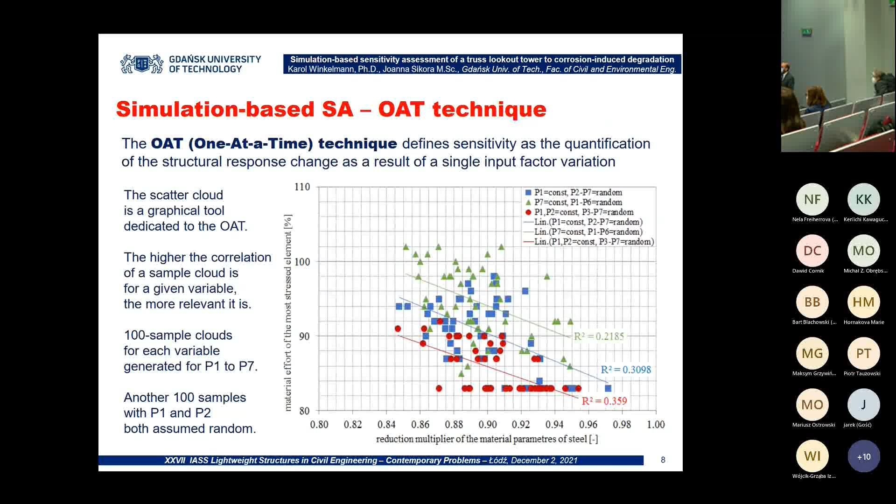Also, we have applied a direct Monte Carlo approach, but not to define sensitivity indices, because considering 100 samples where all the variables turn at once, where there is no variable held in its ideal state, ideal condition, considering 100 samples is not enough, and those results that we get from the scatter clouds approach are clearly not good, are clearly erroneous. But we have done this simulation to point out that many of the samples, many of the towers which have been degraded in the numerical model, lead to failure, lead to structural failure.

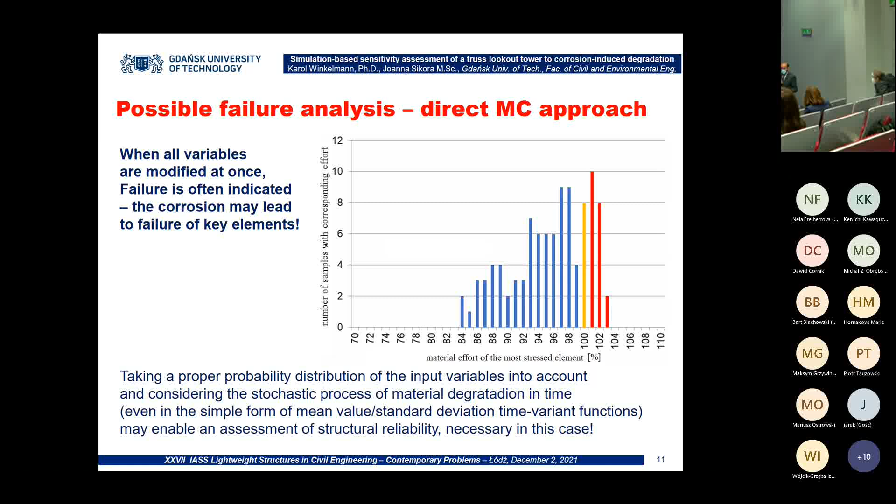So we are clearly sure that at some time after using the structure, when it's not so late, not 60 years, we are now calculating how many years it would take for the structural failure to occur. But as you can see, that is a large problem. So again, corrosion in Gdańsk, or near the seaside, the corrosion is a major problem.

Also, I have used the response surface method to assess the sensitivity indices. And as you can see, using a prior analysis where we can define those two groups with the major influence on the tower itself, we can form a dependence. We can investigate the impact of the correlation that is imposed by those two crucial degraded groups of parameters on the entire response. And as you can see, with only 25 points added, 25 FE models considered, we have a full image of the correlation that occurs when the corrosion hits the two main groups of elements, those two groups with the initial highest level of

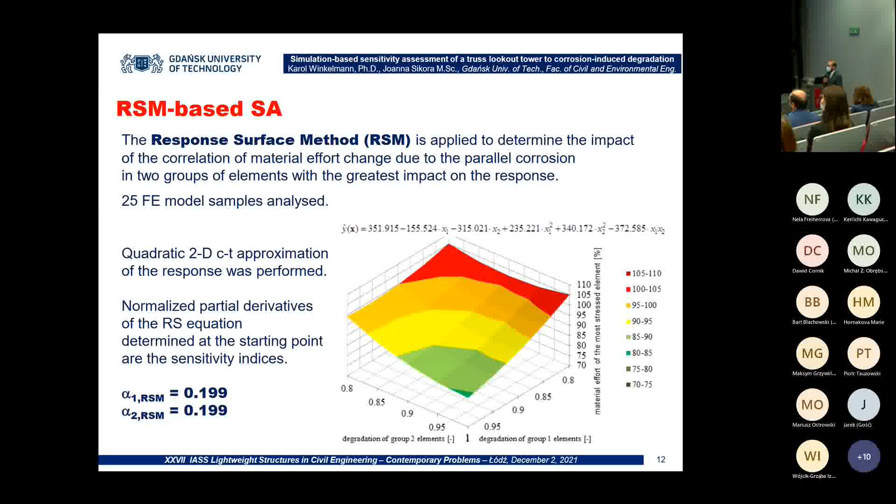stresses in them. And sorry for the little typo, because the sensitivity of variable number 2 is lower, it's 164 — sorry for that typo. So also we can see that evaluating the sensitivity with such simple techniques, using few models, is possible.

To conclude the paper, as we can see, there is a possibility to implement a simplified sensitivity analysis procedure when we can recalculate FE models. It's a good tool for modern day engineering because computer power constantly increases, so recalculating the models is now a question of minutes, not days or weeks. However, we must know that the appropriate sample number must be generated, and a convergence analysis should be performed in order to ensure that the results are trustworthy.

And as you can see, the failure of the tower near the end of the operation time is very possible. So repairs should be planned, should be taken, and we are planning in our study to indicate after how many years they should be introduced for the tower to stay safe. This sums up future plans, which are based upon those things that I have mentioned, and also the assessment of structural reliability. Thank you for your kind attention.